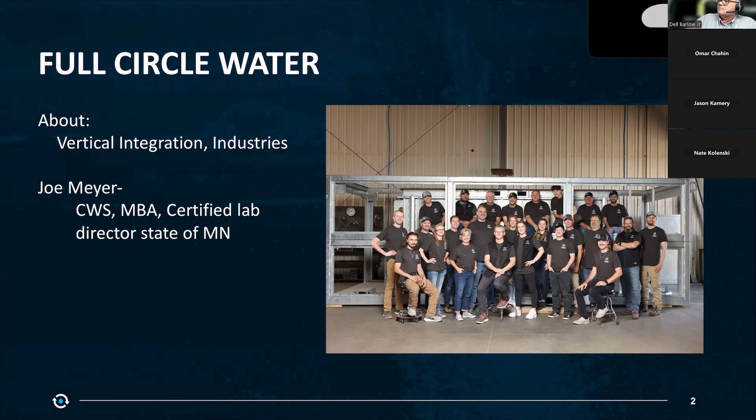And then installation and service. So that's a little bit about us. What we're going to talk about today is: is your water system ready for the future?

The way I look at the fabrication industry over the past 20 or so years, water was an afterthought 20 years ago. Most people just used pits and discharged water, typically outside to storm water.

And that's being enforced so heavily in most major markets now that very few people are doing that. If and when they do it, it's usually kind of under the table, because there are so many regulations requiring that not to occur.

But during that 20 years, when people asked about water systems or put a water system in, it was typically done.

Just as a band-aid. Let's just do as little as we can to get by.

And over the years, when people experienced the pain and suffering around dealing with a water system that was not meeting the needs and challenges of the facility, people realized, oh, we need to invest more.

We want nicer equipment, etc. So the manufacturers in the industry that make water systems have matured as well, and the equipment has gotten more sophisticated.

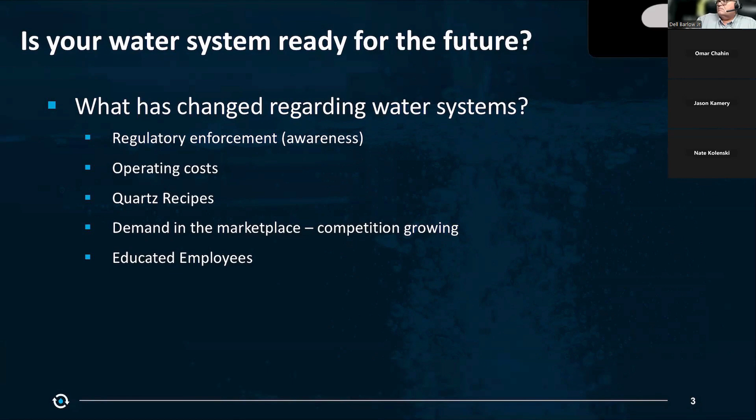We think water is one of the most overlooked production tools. In the past, I don't think people would have thought of it as a production tool.

But fabricators have struggled with managing water and saw the downsides of not having that water available when needed, at the quality needed, and the cost of that.

People now are considering it as a production tool. And I think we're all familiar that the reason we use water in the industry is to control the dust and to protect tooling. And I think we're all aware that as our water quality suffers, we notice it.

We notice it in our product. We also notice it on the tools, the capital equipment itself. And some of you may or may not be aware that water quality, that recycled water, directly affects the silica levels in the shop.

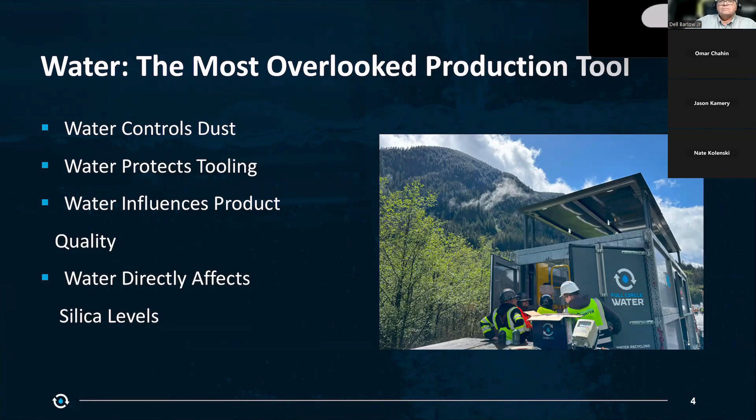If the water is very dirty, it's going to carry silica back into the shop, and when it dries, you're going to have elevated silica levels.

So jumping right into the 7 signs your water system might be holding you back: if you notice your water looking very cloudy or turbid at times, that's definitely something to look at and improve.

And there are add-ons now and chemistries available that can improve your water quality, even with an existing water system.

Again, anytime you see cloudy, milky, or gritty water, you're going to have a high silica load in most fabrication facilities. Anytime that water gets reused, it's going back, getting on surfaces, getting on your equipment, getting on the floors.

And anytime that dries, people walk through it. I think you're all familiar with that.

There's been some testing by a few fabrication outfits where the silica levels were actually highest in the carpet area coming in from the shop into the office.

And the spaces around that entry point actually had higher silica levels in the air than it did outside in the shop.

So it's something to be aware of, and that's because your shoes are grabbing that wet slurry and moving it into that carpet area, and then when it dries out, it can become airborne.

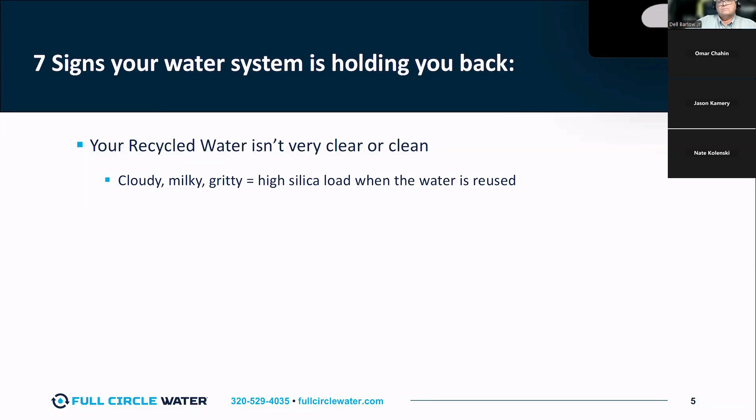It's a form of contamination that people don't pay attention to. I mean, when I was in the fire service, contamination was everything. And this is just another one of those things that most people don't even think about.

So if you see footprints going into that carpet, that's a sure sign. There are some ways to mitigate that with any water system, and we know guys who are using fresh water to wash down, floor scrubbers to scrub 2 or 3 times during the day, especially in that area moving back into the office.

If the water's impacting your production, where your hand polishers or your CNC nozzles are plugging, or the seals on your pumps are failing and causing an emergency where your shop's down because a pump is not running and you're waiting for that part or overnighting it, there can be escalating costs that just snowball with failures.

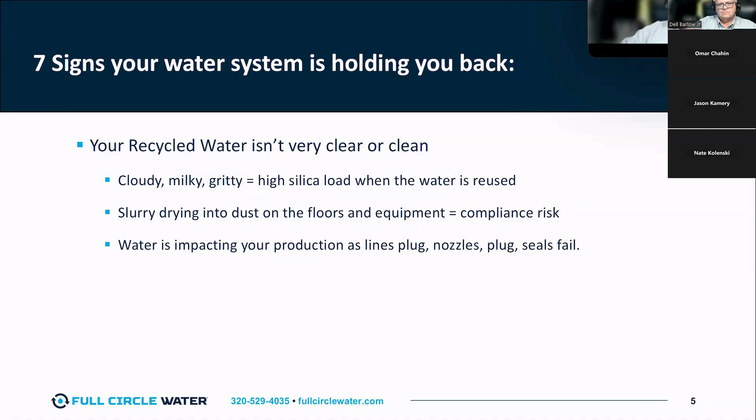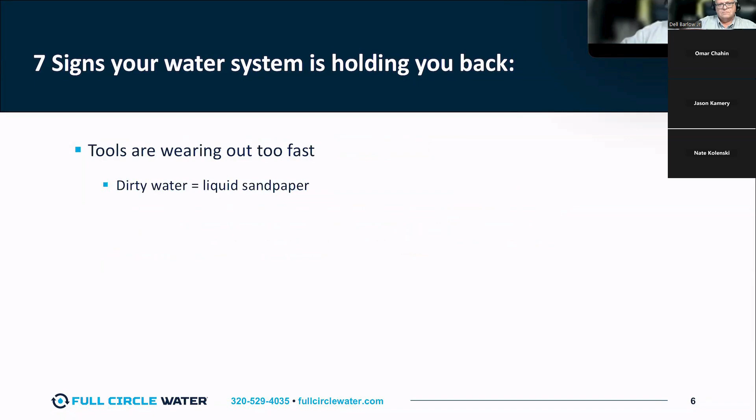Tooling, if it's wearing faster than normal, or if you're seeing a lot of corrosion, these are all things pointing to, hey, giving your water system a little attention and looking at what can be done to improve some of these touch points.

Your polishing pads, etc., if you're noticing life changing, if you're seeing equipment or tooling costs or maintenance costs, especially on pumps, that's usually a water system problem. A lot of times it may not be the pump itself, but it's the water the pump is pumping.

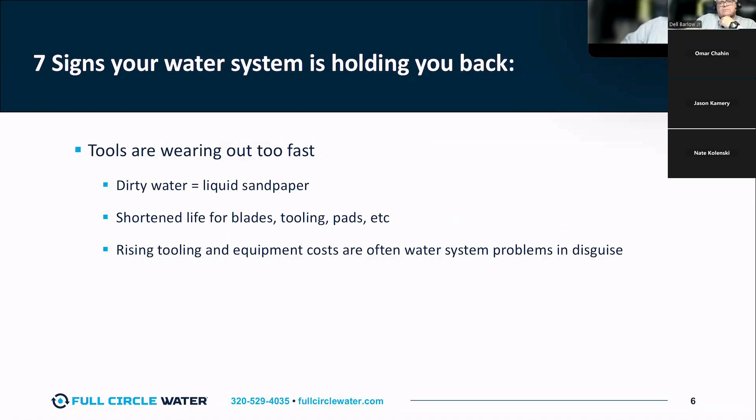If your slurry management feels out of control, your water management - so if you're throwing people at the problem and having issues because someone who had the knowledge left the company and everyone's really struggling, that's a sign that water system is holding you back. A lot of times you can reach out to your existing equipment provider and get some training, whether it's a Zoom or Teams meeting or an on-site consultation to come in and help get you back on track.

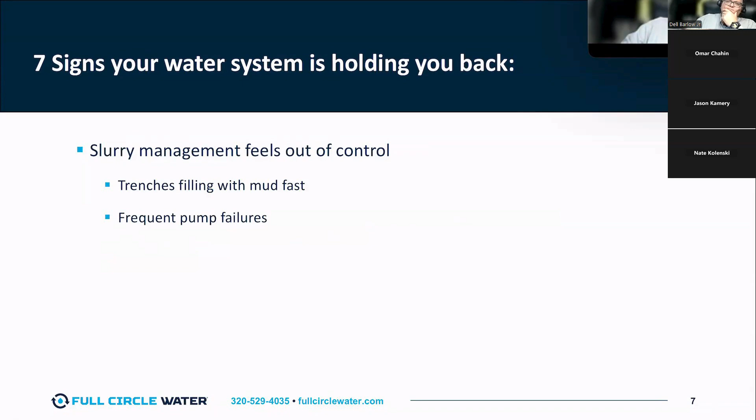If you see your trenches filling with mud really quickly, or your pits - again, frequent pump failures, that's probably the most common one we see with customers. That's the most common sign that there's water issues in the shop.

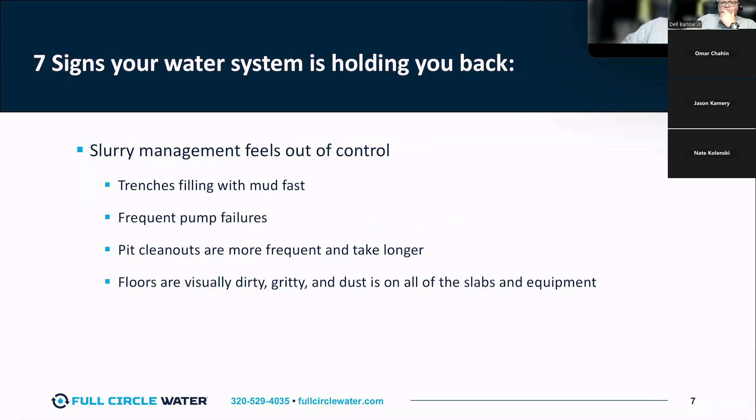Pit cleanouts, we talked about that. And then the floors, if they're visually dirty, gritty, dust on slabs and equipment, that's a sign that recycled water is passing silica back into the shop due to how dirty and cloudy it is.

If your production actually slows down when your demands go up, we seem to see this, and sometimes it's plumbing related, where the plumbing manifold in the shop is not sized properly, and anytime the flows rise in the shop, the pressure drops, and then we get pressure alarms, and CNCs will shut off, or the hand polishers at the end of the shop won't have enough water flow to adequately do their job.

Or if your clean water filtration method, using a clean water loop, doesn't have enough clean water, so when your production demands go up, you're actually noticing that you're not getting as much throughput. That's a sign your water system is holding you back.

Again, shop growth - if you're trying to use more water than the system will put out, that's common as shops grow and evolve, that they run out of capacity in their existing water system.

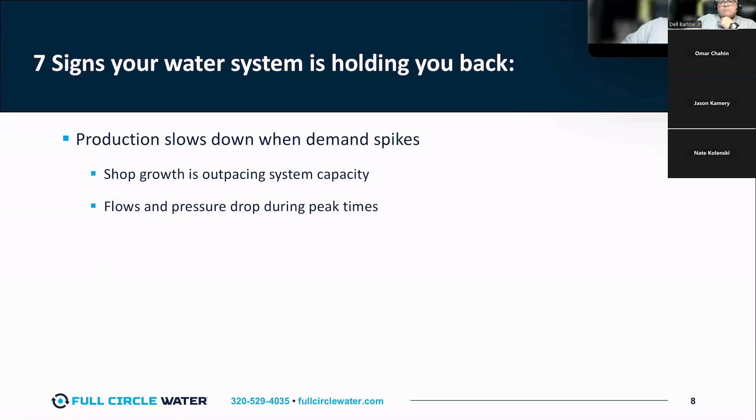Flows, if your flows and pressure drops during peak times, people complain about that, and that's another sign. It sounds funny to say production slows down when demand spikes, but it's not uncommon to see that.

Employees are managing what equipment operates and when, and this is one we hear all the time - well, we don't use that line polisher unless, these CNCs are removing material, doing some material handling, or we tell them to turn the CNC off for an hour or two. And that's a sign, hey, you should be looking at pump capacities or plumbing or your water system.

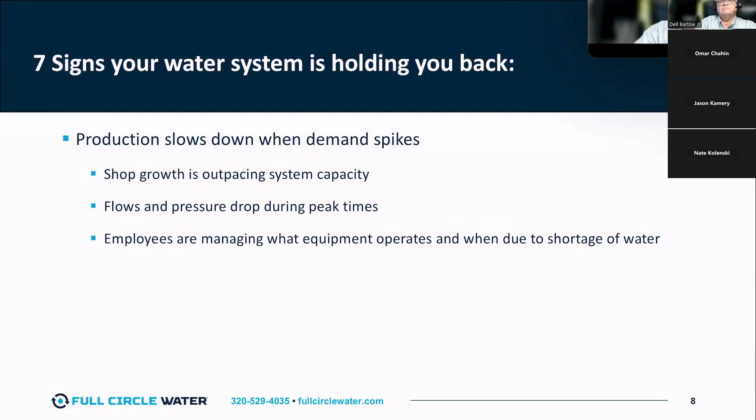If your operators are reporting dirty finishes and more rework, that's a sign that you may have an issue here with your water system.

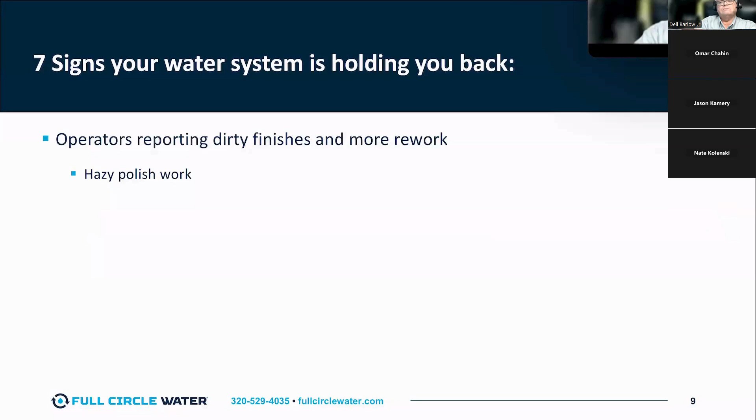Hazy polishes, a lot of times I would say that's most commonly training with your polish guys. But hand polishers that are clogged or the pads are not working effectively - that's something that's not uncommon, where the flow to that polisher will slow down, and the pads will not be as effective due to poor water quality coming into the hand polisher.

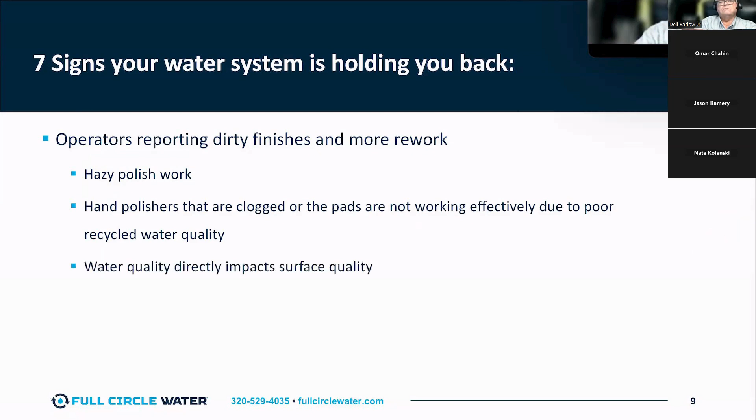As you guys are all aware, the silica compliance concerns are growing rapidly. We all know what's going on in California. What happens is these local agencies and OSHA groups working on silica compliance all throughout the United States learn from each other now.

Like we said in the beginning, your water, recycled water, if it's not clean, it's going to have fine silica in it. And as that water gets used in the shop, it ends up depositing silica on all surfaces. The one that's most prominent for respirable silica is the floor. That's where we're going to really see it.

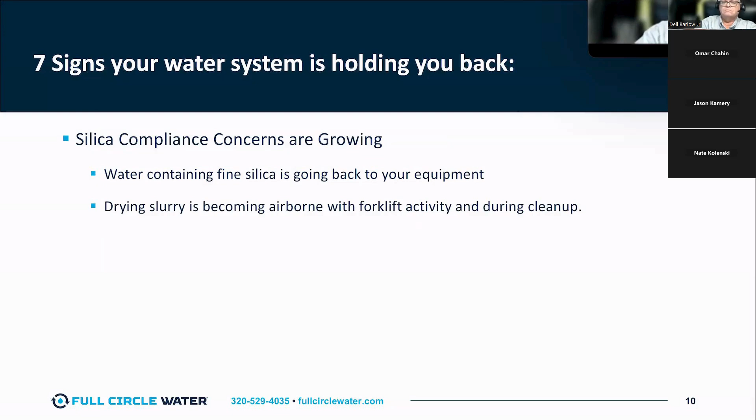We did a test in a shop recently where we had 3 silica testing devices. In that particular shop, the forklift activity was a concern. The good news is the shop was below 50 - I think they were around 20 for a high level. They were below the 50 threshold, but their highest levels were where the forklift was moving through an area all day long.

If your employees are complaining about the air quality and their clothes getting really dirty, that's a good sign that your silica levels are out of control, and very likely your recycled water's dirty.

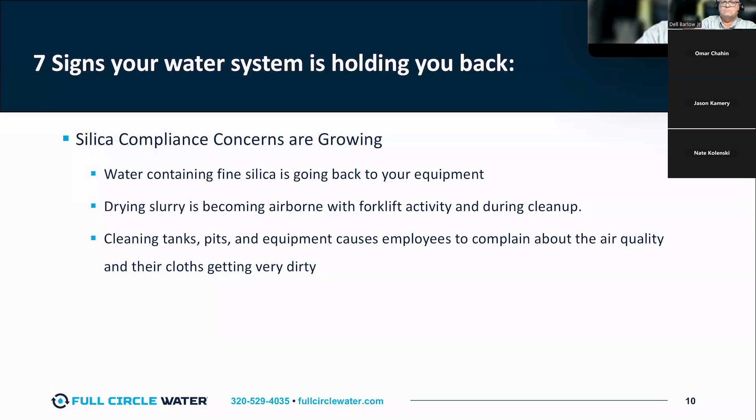If you're just noticing more and more maintenance - pipes, nozzles, pits, tanks, broken components, pumps burning out, water production not keeping up, if you're delaying production work to try to fix problems on the water system, whether it's replacing filters or filters clogging quickly, sometimes multiple times a day in some shops - that's a sign that the main water system is not doing its job. Sometimes that's as simple as dialing something in. Something needs adjustment, and it can make a big difference.

One thing we see is that the modern systems now reduce labor, where the old systems created more labor and require more labor.

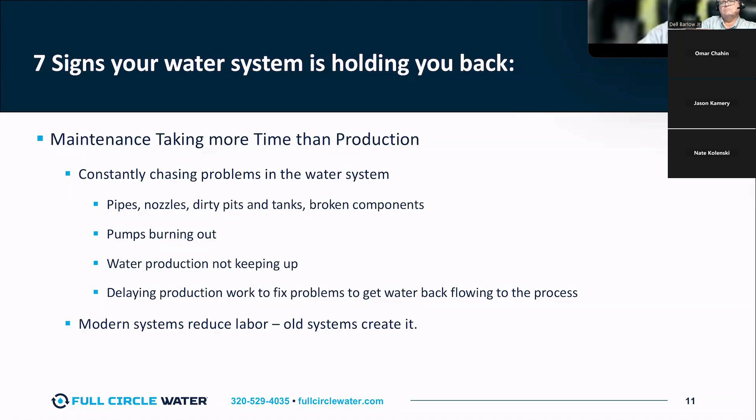What we want to see in a water system is visually clean, relatively clear recycled water. In a perfect world, it looks like drinking water. That doesn't always happen, but if we can keep that visually clear, so you can take a water sample and read something through the water bottle, that would be an ideal situation. If you have water like that, you're going to eliminate a lot of these problems.

If you have consistent pressure and flow in your shop, and if there's a way for that sludge to not require human intervention when it's removed from the system, whether it's a filter press, filter cartridge, or sludge bag - if that process is automated, that's typically an ideal situation.

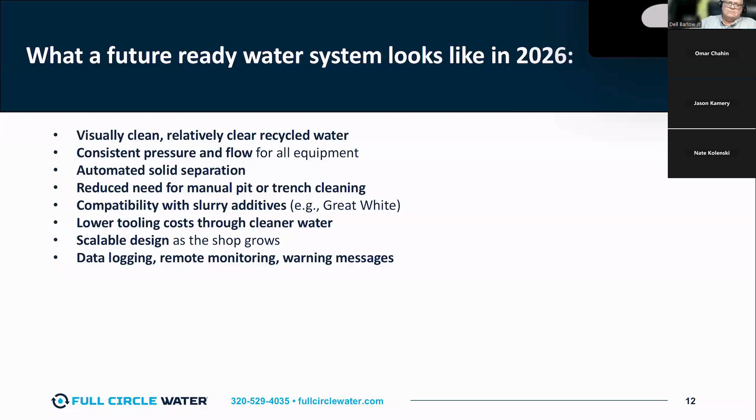I'm sure you're aware that equipment's coming out now with data logging, remote monitoring, detailed warning messages. That's all something you want to look for in new equipment - the capability to send warning messages to your email or text, to track running hours, how much production went through a piece of equipment, how many linear inches of a certain profile is produced, etc. That's all really important data for managing your shop in the future, especially with AI tools that are coming out that will replace a lot of our number crunching and the brain power needed to get actionable information that helps us make good business decisions.

Just a practical checklist here - things to think about: does your water flow drop when multiple machines are running? In a normal shop, if you add up all your water usage across each piece of equipment, a decent sized shop might be 120 gallons per minute peak flow. It's very common that shop will only run around 35 gallons per minute when you add load and unload times and machines turning on and off. It's usually somewhere around a third of that max flow rate where we're operating on a consistent basis, but there'll be times during the day where that flow gets really close to peak flow.

When that happens, do you experience pressure drops and sometimes error codes? That's an important thing to be aware of. If you do, how often is it happening, and how do you eliminate that? We've seen people put in pressure tanks, larger pumps, or replace entire water systems, depending on answers to other questions.

Probably a big one we see is, are there times when your employees are choosing not to run equipment due to a lack of clean water or lack of flow or pressure? We see that on smaller systems when people outgrow them, where they can only produce so much water, and the shop is actually juggling around that bottleneck.

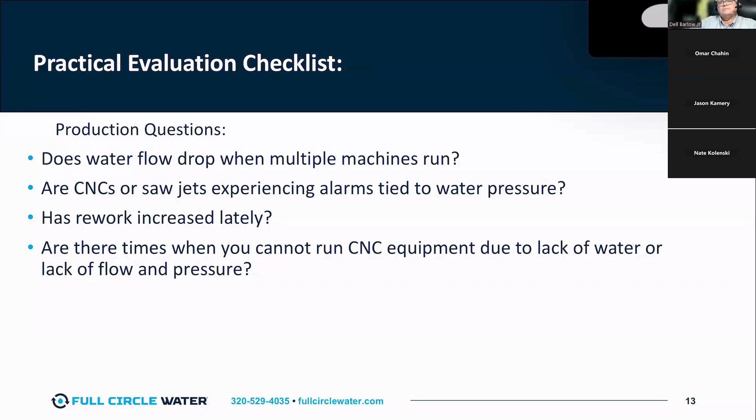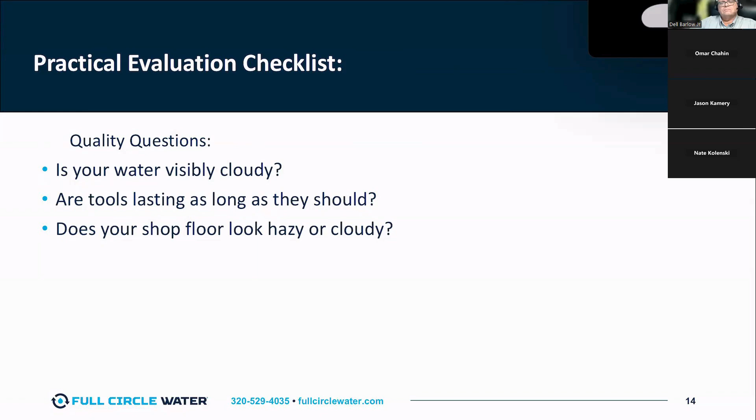Some quality questions: is your water visibly cloudy or dirty? Do your floors look hazy, cloudy, dusty? Are tools lasting as long as they should? These questions will help with water quality issues - just identifying it, paying attention to it, and then looking for the solution. A lot of times the existing water system is capable, it's just not running the way it should be. It's not being used properly, or something needs adjusting. So it's important to reach out to your manufacturer if you're running into those types of problems.

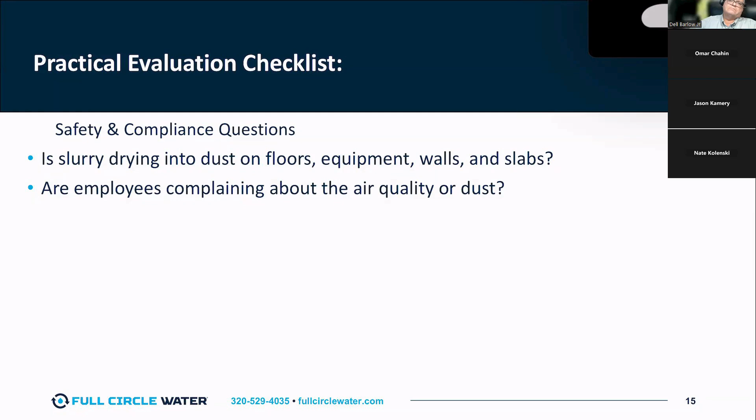And the one we're all aware of is the silica issue. Are there air quality and dust issues in the shop, and how can you mitigate that? Through ventilation, through cleaning, through improving your water quality on your water system - those three seem to be the real big ones. If you can make sure your recycled water is as clean as possible, keep your floors and surfaces clean, and keep your ventilation in check, you should be able to minimize those issues with silica.

The big maintenance ones are pump seals and filters failing frequently. A lot of times that'll cause a hard down situation in the shop, where there's no water flow, and you're either going over to city water and dealing with your excess water, or your shop is just down and you're sending people home. And then if cleaning feels like a constant activity, where you're putting a part-time or full-time equivalent employee on it, that's a sign too.

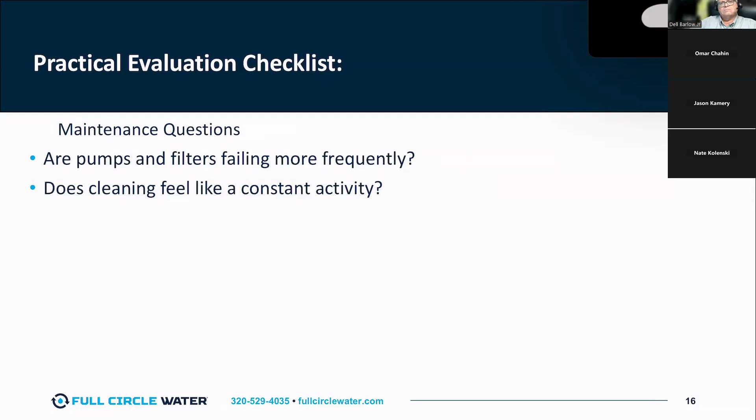This is very common feedback from people that are moving into newer water systems. And some of you may know there are some really exciting dry chemistries now - they're a little more expensive to operate, but they're doing wonders with silica levels and cleaning the water.